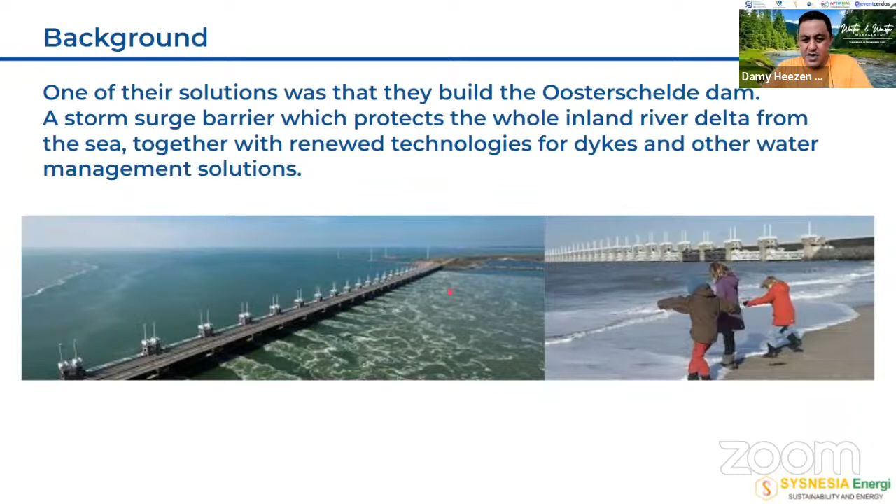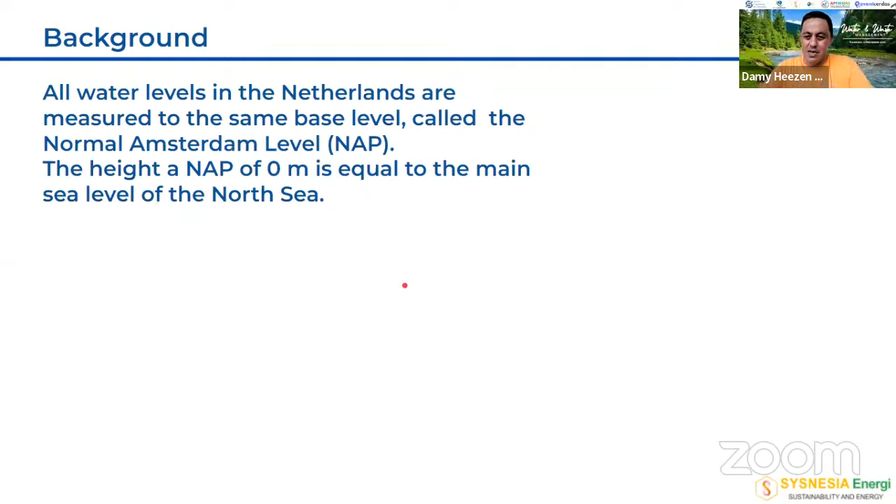So in the Netherlands, all the water levels are measured at the same base level. We call that Normaal Amsterdams Peil, NAP level. At the height, NAP is 0, and it's equal to the mean sea level of the North Sea. This is a special pole in the river in Amsterdam, and that's the symbolic number 0. Everything is measured above or below that.

And so until today, even when the Netherlands is one of the best countries in the world in water management, we still have challenges, and it still causes big problems. If you see the picture, the rivers like the Rhine and the Maas start in the mountains in other countries, and the melting ice always comes down with all the rivers together, and then it will flood the highland, and so the inland of the Netherlands.

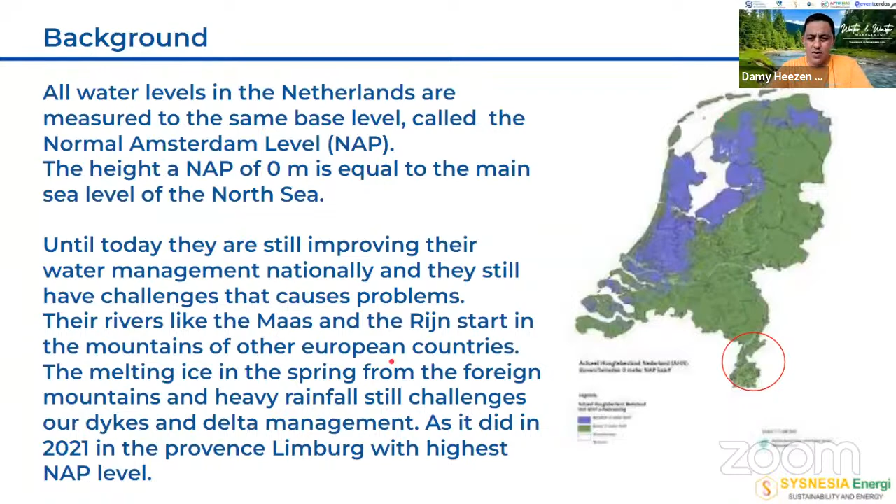For example, last year in Limburg, that is one of the provinces with the highest NAP level, maybe 30 to 40 meters above, it was destructive. Cars, furniture, houses, everything broke down, simply because rivers flooded. So it's not only an Indonesian thing that flooding damages. This was just last year in the Netherlands because of flooding rivers that come from Germany and France into the Netherlands.

As you can see, how much devastation.

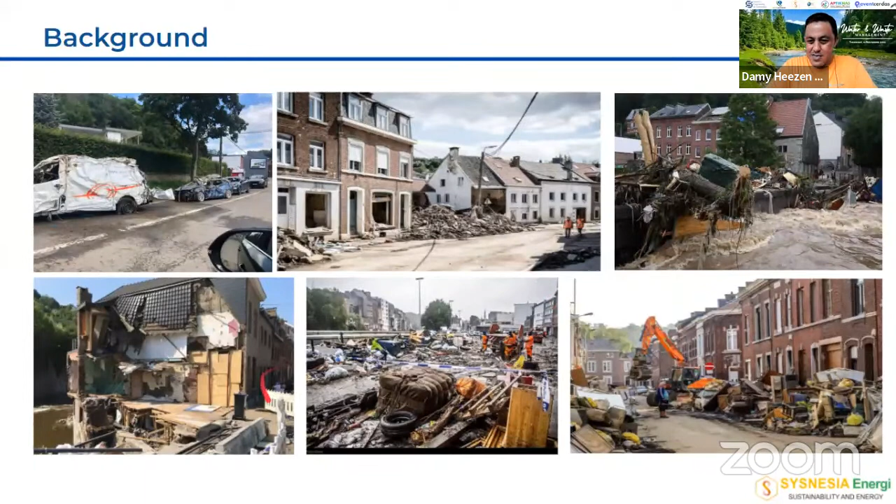So even when we are the best, we still have big threats, and the biggest threat is still to come. Like Indonesia, the sea level is rising, and in the Netherlands they expect a sea level rise of 5 to 7 meters, maybe even 15 meters. That's a huge challenge, mainly for cities like Amsterdam, who's 2 meters under NAP, Rotterdam, who's 5 meters above NAP, and The Hague, that is 6.5 meters under NAP, but also sinking like Jakarta. That is also a big challenge.

And so if we do nothing, then the Netherlands will flood like this. More than 40% will be underwater if we do nothing. Of course, we did something, and that's what I'm going to explain a little bit about.

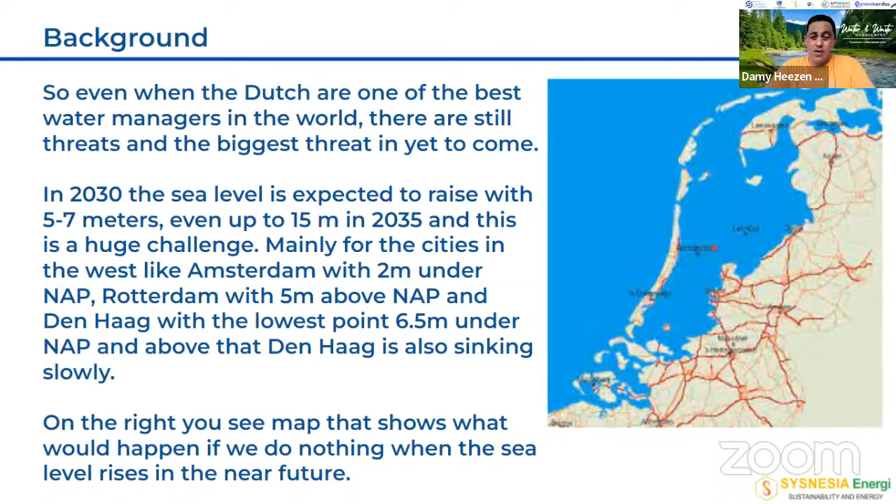Many cities are already prepared. In the Waddenzee, there's already improvement, and in the IJsselmeer there's already a lot of improvement. There's a lot of canals that they are making, a lot of water irrigation, sponge systems. So there's a lot of work going on, deepening the lakes.

So let's take Rotterdam as an example. Rotterdam and Amsterdam have a lot of challenge with rainwater, separate from the threatening sea level that's rising. And when the sea level rises 5 to 7 meters, this is a really big problem for the almost 800,000 people that live in Rotterdam.

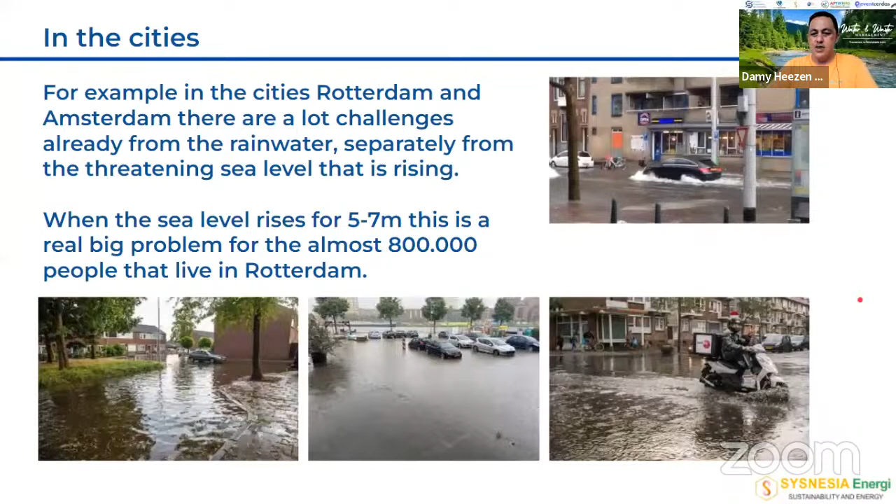If you see, this is a normal rainy day. And it's the same phenomenon that we can see here also in Jakarta, for example, or actually in Java and other islands. So it's not rare, and we still need to manage this. And we did a lot, I will show that. So let's take Rotterdam.

If they do nothing, then the city will look like this. This is actually normally a boulevard, in the business area and the tax office around the Erasmusbrug.

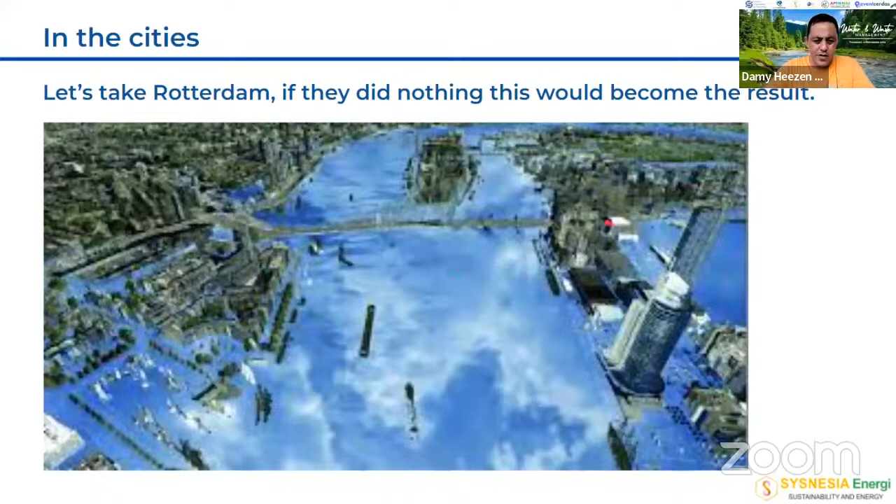So how did Rotterdam solve that? Because that's actually what we want to know. How did they manage to protect the city from the sea level rise and the increasing rain?

They're not done yet, but the targets that they had for the first protection plan and transition of the city are already done. So over the last 15 years, they worked hard on it. And of course, they're not done. They're going to do it further on.

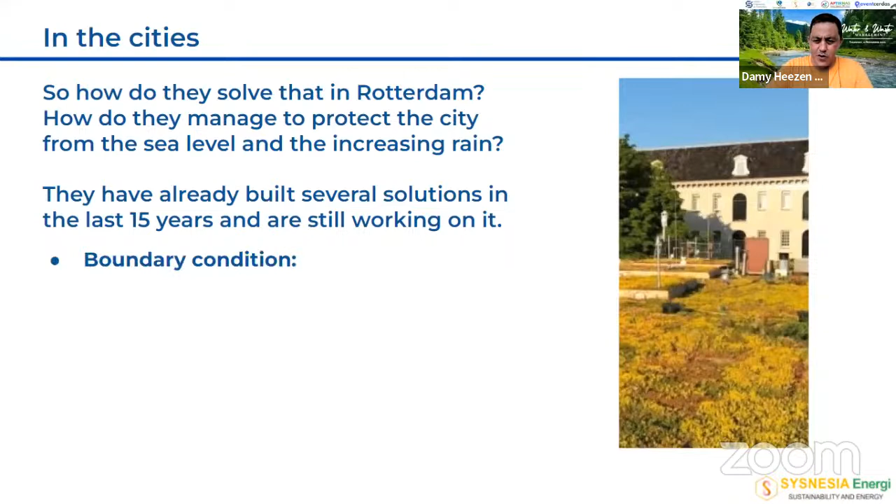There are some boundary conditions. There's a rainwater ordinance, meaning the government has a building regulation for rainproof development where 60 to 90 millimeters per hour of rain should be absorbed into the infrastructure, stored, or drained. So store at least 60 to 90 liters of rainwater per square meter and drain this over the next 6 hours, meaning by water reservoirs, lakes, ponds, everything possible to absorb water, the infrastructure has to absorb that.

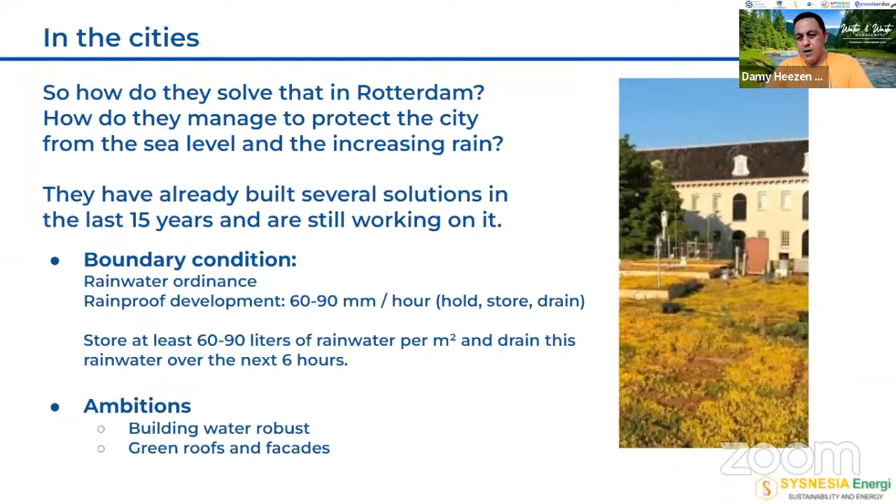It is also for many reasons. The ambition is that there will be a lot of green roofs, because green roofs also hold water and then the plants use it, and that way it benefits. If you combine that, in this case with facades, you have the same effect. And also with building water robust, meaning merging the building with water usage.

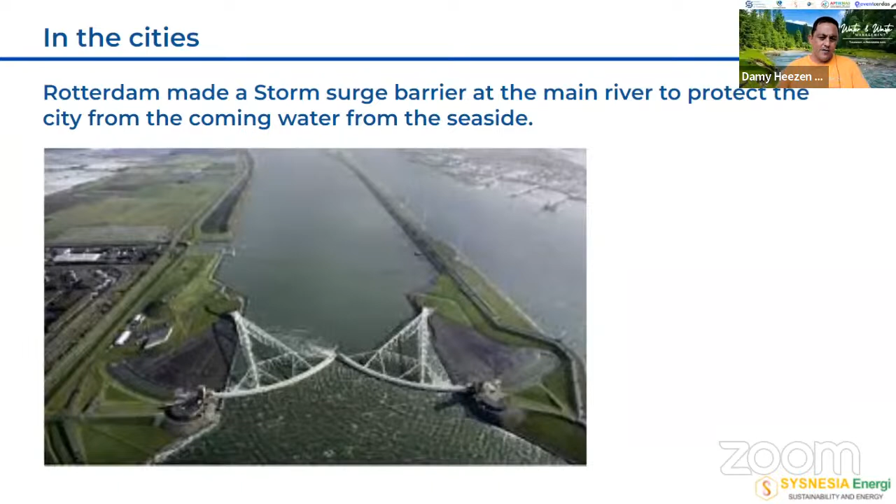In the big plan, first what Rotterdam did with the side rivers of the Maas, the rivers that access the city directly, they created the storm surge barrier simply to protect the city from the water from the seaside, to make sure that part is controllable. The river water is a little bit more difficult than the sea.

Rotterdam made a new water development plan, not only to protect the city, but also to let water become one with the city. Part of the city will be on the water, and part of the city will be serving as a sponge to store and manage water.

If you see the central area, that's where all the shopping is and the big shops and offices, that is Singel City and sponge city. Many of the water in that area is actually absorbed by underwater structures, smart engineering, and green rooftops.

River City is, of course, living with the water, and that is now expanding in this area where they are creating floating harbors, but also floating living blocks.

And then we have Canal City, where we smartly merge the water into small canals in the parts where we live. And that makes a triple function, right?

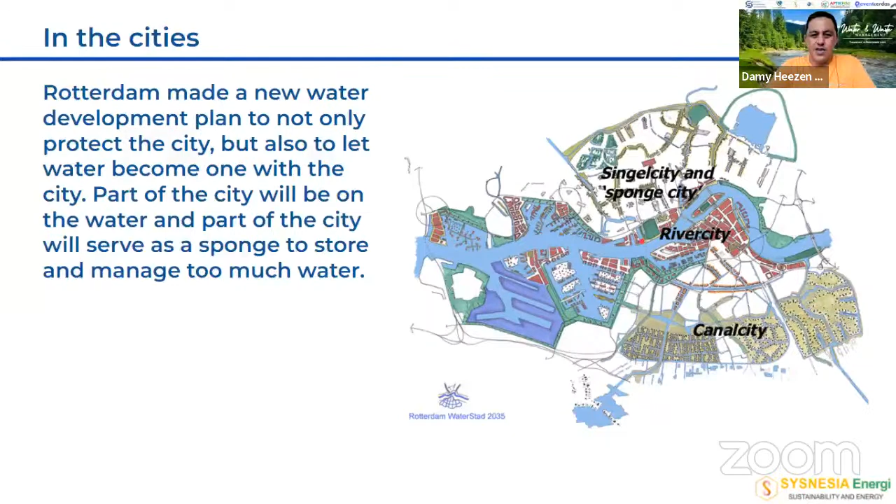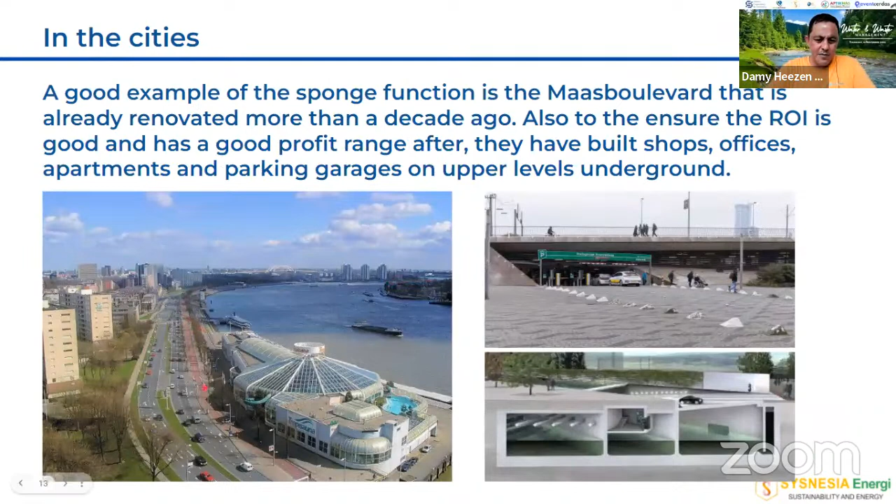A good example of sponge function is the Maas Boulevard. Maas Boulevard is a big boulevard that looks like a lot of concrete, but what's really happening under the Maas Boulevard is that, as you can see on the right, they have water canals under it. So when the river floods, the water goes under the road first instead of above the road. They have special areas you don't see here that can flood, meaning the water has more space and the river can expand a little bit.

To make sure the return on investment of the infrastructure is shorter, they created parking garages and all kinds of facilities like swimming pools, hotels, restaurants and shops, but also apartments on the boulevard. That way such solutions become profitable and get a lower return on investment, because in the end it doesn't only have to cost money, it also has to make money.

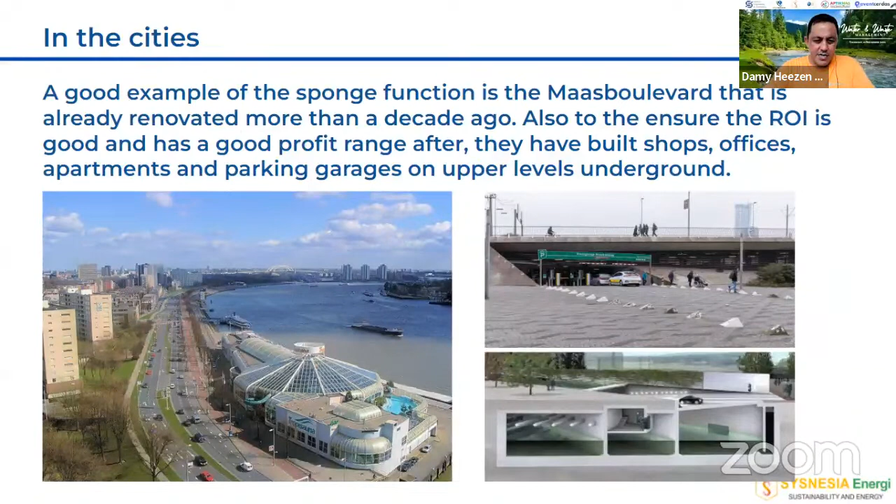That's the most important thing: to sponge more water and use the benefit, the city gives subsidy for green roofs. So in Rotterdam, green roofs are booming at the moment.

Inside, you can also park your car in 2 stories, and on top of that, you have a rooftop, and on the rooftop is a park where people can relax, have a picnic, and that kind of stuff. So it is one of the smartest objects in the world, I think, with multiple space use.

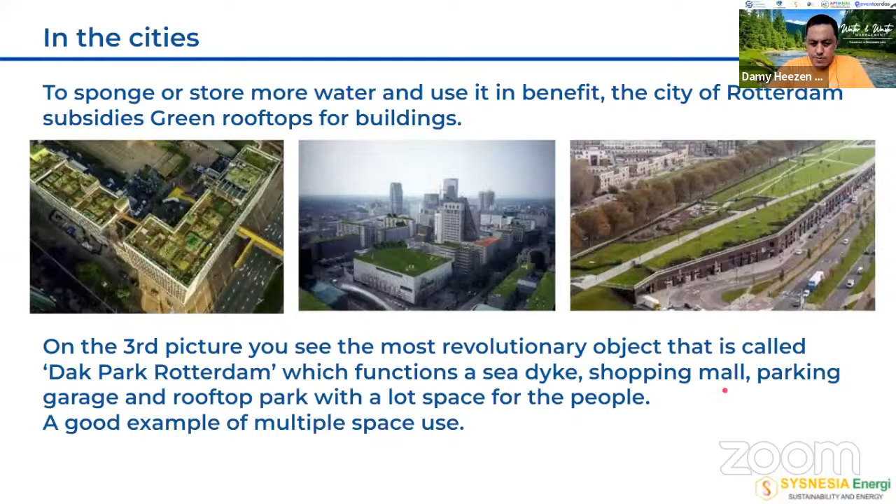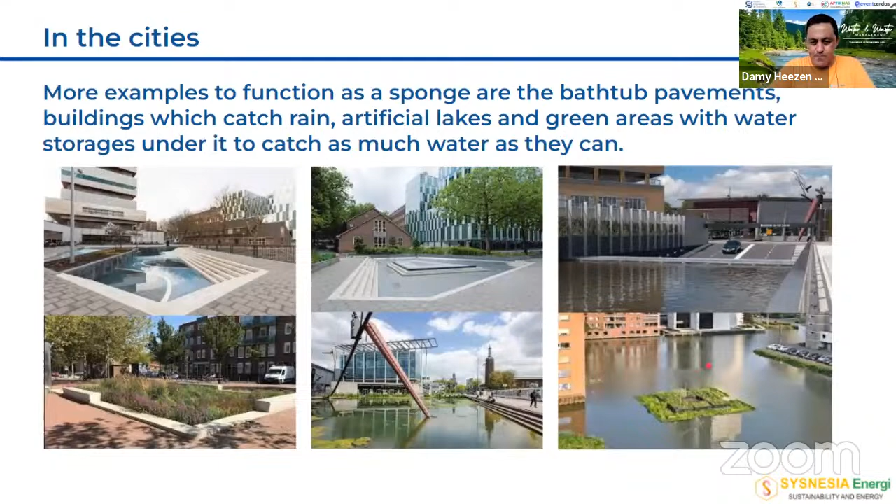Then in the second part, we're going into the floating situation. This is a new project, now moving to Nassauhaven in Rotterdam, where they want to introduce floating houses, so you can live on the water.

And then we have the floating farm. Floating farm is a unique concept. What they did is they have an 800 square meter farm, 2 stories high, with around 40 cows on top, with a location outside on the shore for them to graze, and under it a factory for all kinds of products like milk, cheese, yogurt, those kind of things, and it provides its own energy. So this object is fully off grid, and also provides food for the city, and that makes it possible to grow food and raise cattle to supply the city with agriculture products.

Why is this unique? Peter van Wingerden, the founder of this, chose cows not because cows are cool, but because cows are the hardest thing to do. Of course, he could have chosen lettuce or paprika, but if you can put cows on a floating island and it works, then you can actually grow anything.

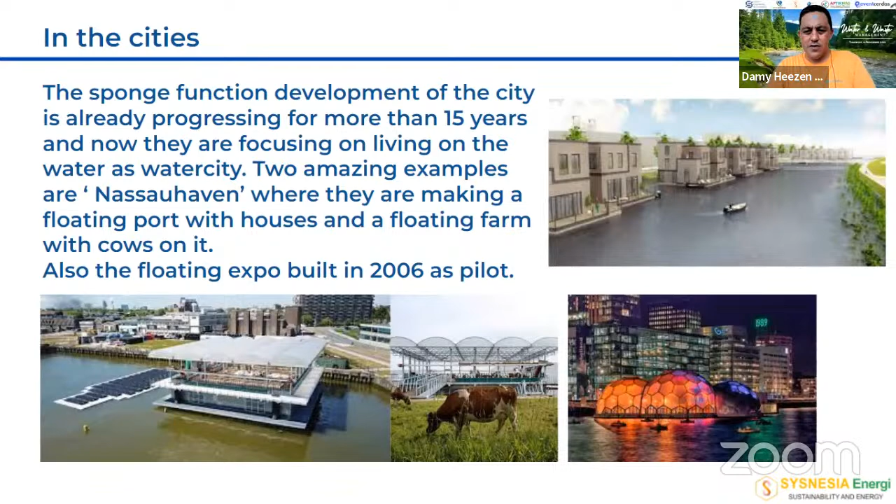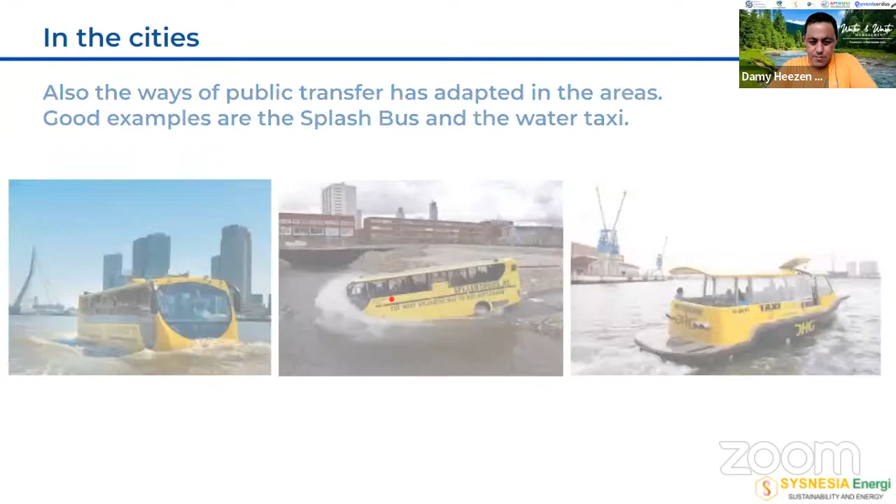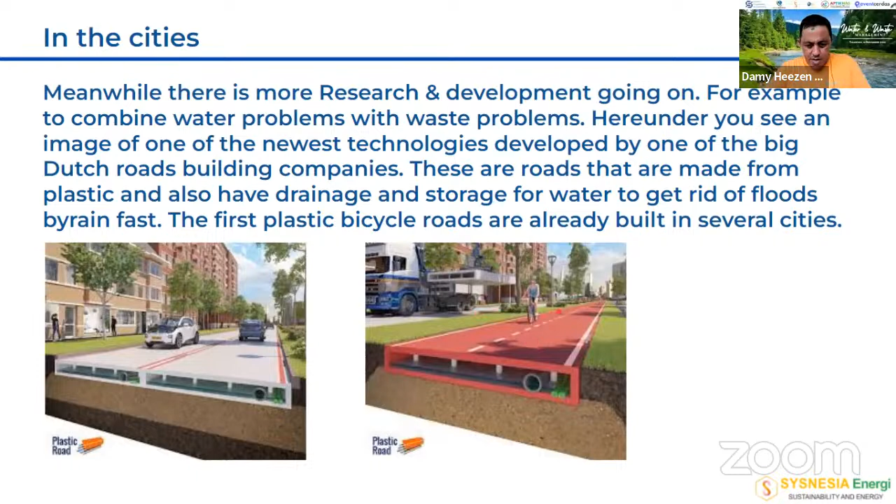With the present climate change, water management is a very hot topic. And in my network, I will try to help Indonesia find suitable solutions for every challenge in the business-to-business structure.

This is just one episode about water management. The reason I chose this is simply because I have a lot of conceptual designs, made for Bangladesh, made for other countries like Jakarta where we have a lot of flood solutions. But today I wanted to show how we made it for Rotterdam, because that's already proven, it's already there, and we can learn from it.

And the most important thing is that every infrastructure is different, so that means every solution is different. Indonesia originally has 2-3 months rain season, maybe sometimes 4 months, and the other months there's no rain. So there needs to be a solution that can balance the cost and benefit. I have several ideas for that, but I can do that in another situation, maybe in a private session.

For example, here we have the Ciliwung and the Citarum River. Citarum River is seen as one of the top 3 biggest disasters in the world. I've lived in Indonesia for 6 years, and I've been involved with the Citarum team for almost a year, 1.5 years, and actually it's not that bad, it's solvable. It can be solved simply, but for that you need community development - you need people to work with you.

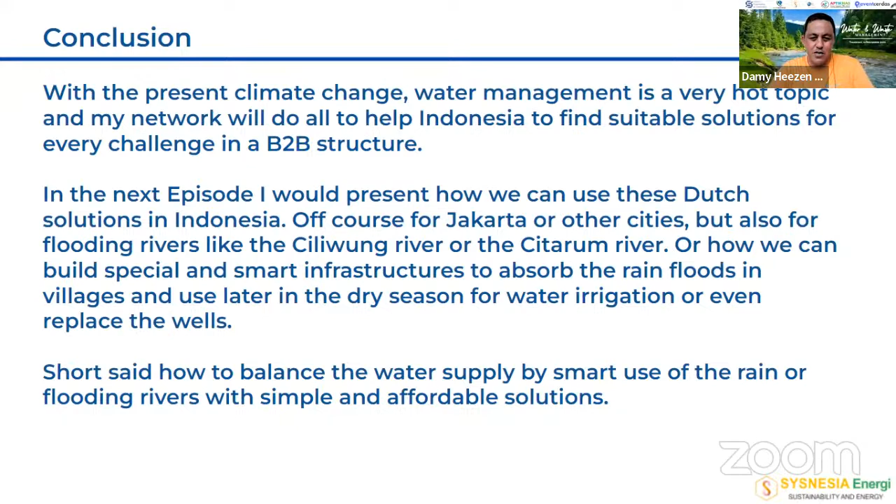So shortly said, how to balance water supply by smart use of rain or flooding rivers with simple and affordable solutions. Sustainability doesn't have to cost money. Water management also should not be costing money. Yes, it costs money to build it, but it should be profitable for the social economy and for the governments where this is located.

Because I have just a half hour, I want to keep it short. I hope it was kind of interesting.

But Fanky, do you want to go for question and answer, or should I go to the next topic? I think there's only one question asking whether they can get the PPT, so I think we can go forward to the next topic. We will gather the questions in the question and answer session. Okay, Mr. Damy, okay, then I continue.

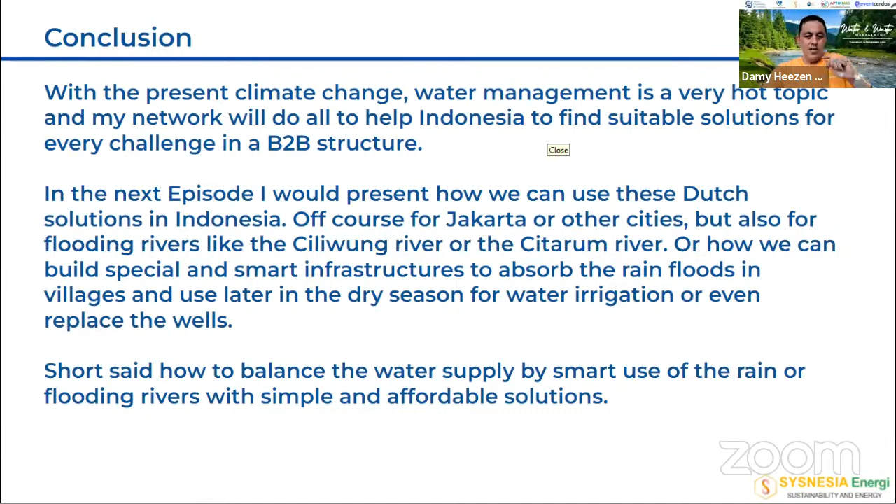So the next topic will also answer the question I just saw: waste management. Everybody knows waste, right? And it's a big problem. Believe me, not only in Indonesia, even in the Netherlands, waste management is a big problem. I'm going to show very simply how we do it there.

What is - how does the Dutch do waste management? Then I will explain a little bit about the basic principles of the technologies. The Netherlands is well known for having one of the best waste management systems in the world. We are actually zero waste, if we talk about municipal waste, and don't talk about construction waste. This is because all our waste is collected as much as we can and processed.

In the first picture, that is how they pick up the waste from a citizen. This is how the companies, in the second picture, offer their waste. Yes, we do split it into organic, non-organic, and sometimes plastic, and sometimes other materials, but I don't want to accentuate that because that's not the most important part.

For chemical waste, we also have special treatment, like what you see here in Indonesia, a lot of motor shops that serve and throw the oil in front of the door. If you do that in the Netherlands, the government will close your shop in one day. You're not allowed to have that next to water. And then next to that, we have waste from constructions.

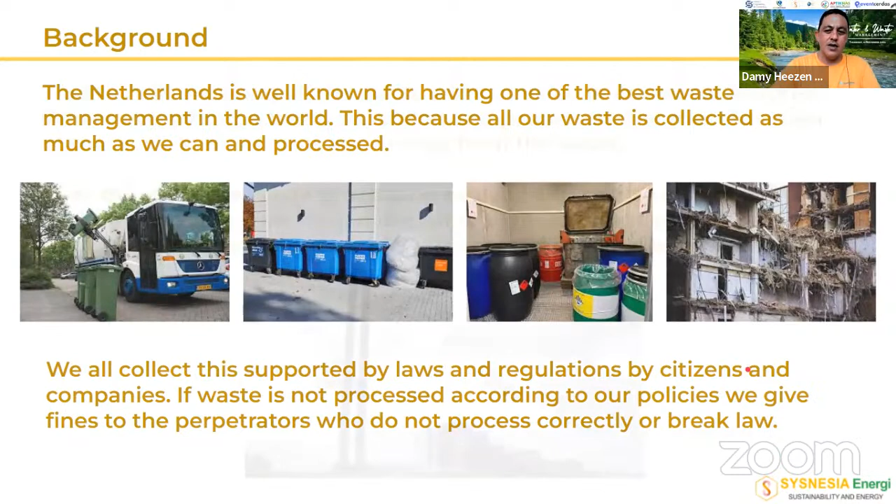Traditionally in the Netherlands, we take all the waste without value to our waste facilities, and there everything is separated and processed. The main function of these is to make heat and energy from the waste. Over the years, waste processing evolved, and some kinds of waste that had no value now have more value than what we create through traditional burning energy factories, so they are processed into new resources.

For example, in the old days we didn't recycle plastic bottles; we simply burned them, and they became slag that went into the asphalt. That's how we made the waste profitable. We burn it like biomass, into energy, and we make heat and energy which we sell. In the Netherlands the climate is cold, so instead of gas, we use residual heat from these factories.

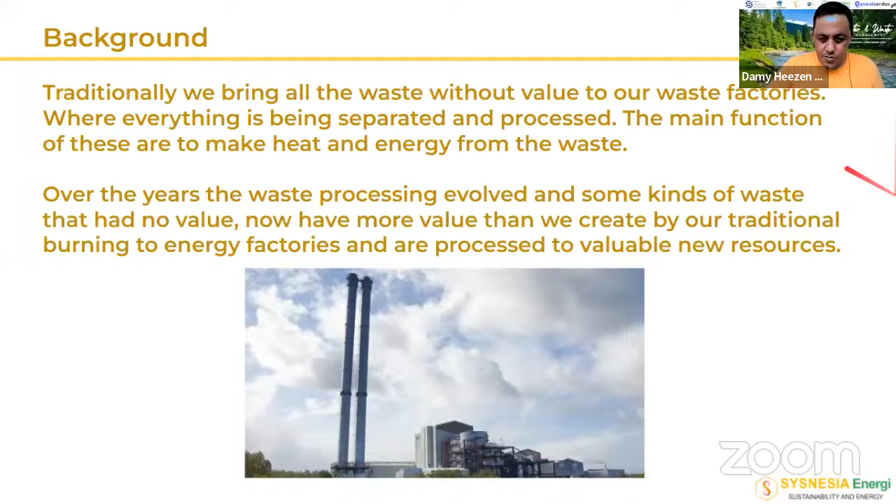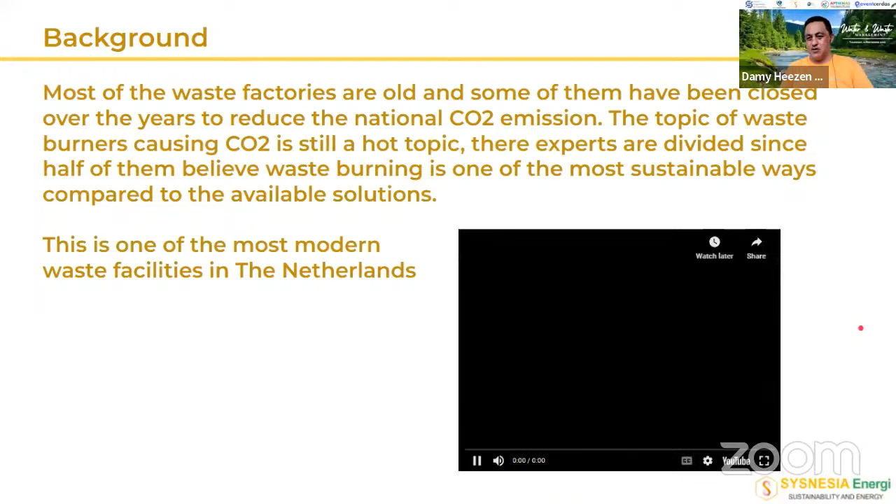Most of the waste factories are old, and some of them have been closed over the years to reduce national CO2 emissions. The topic of waste burners causing CO2 is still a hot topic.

The experts are divided, since half of them believe waste burning is one of the most... I thought the sound was off.

Most sustainable waste processing compared to other available solutions. So waste burning is, according to a large group of experts in the Netherlands, more sustainable than any other way of processing waste. And not because of the CO2, but because of all the other problems you get when you process it differently. What you see in the movie, I'll show without sound because that's important.

This is the most modern waste facility in the Netherlands. This is the HVC in Alkmaar. Actually one of the projects I used to work on as a contractor. This one is aimed at low CO2 and a large recycling capacity.

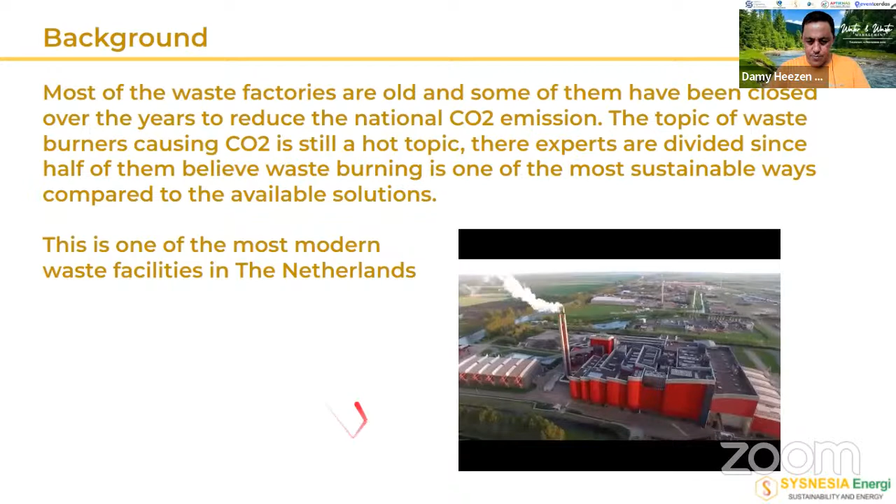So, next slide if you let me. Wastewater, the question I just had, also has several different methods which are forever evolving. Our main wastewater is collected and transported by our sewer infrastructure. That's what we do with the grey water, it goes into a separate channel in the sewer underground. We have a separate underground infrastructure for grey water.

So that should not be mixed with the rivers. It does happen, by the way, especially in the smaller infrastructures.

Before it goes back into the river, it goes to water treatment. So it goes to the sewer, then to the water treatment, and then back to the river or to the drinking water facility. In some cases, we also make drinking water in the waste treatment. That's mainly what we do.

But also in the Netherlands, we have illegal dumping and legal dumping. There are certain companies that are allowed to throw their chemical wastewater into the rivers in small proportions. This isn't always welcomed by everybody. A lot of people are still fighting it, but it still happens.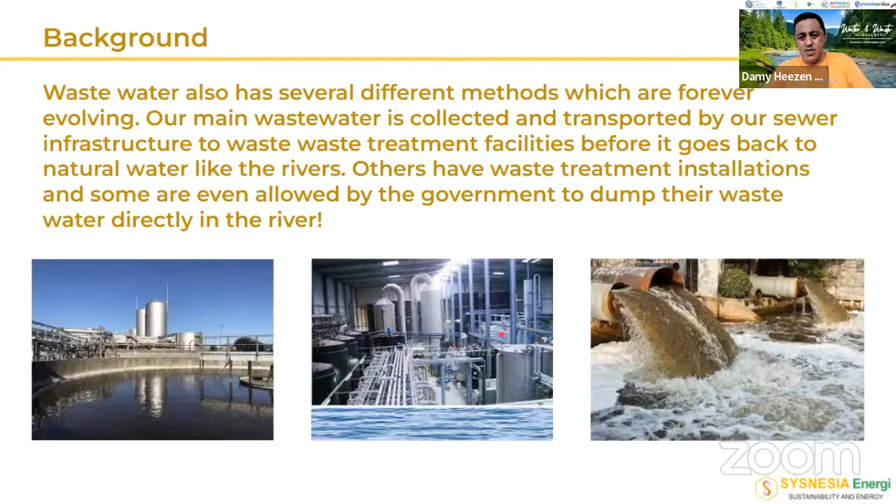Then, next to wastewater, we also have plastic. Plastic is not processed in our country. So the Netherlands never has a plastic problem because why? We bring it all to Asia.

However, since 2019, Asia started refusing the plastic waste from Western countries because it ended up in nature more often than it really was recycled.

Some people blame Asia for being the biggest plastic polluter in the world, but most experts know that the bigger part of this plastic is coming from Western countries. The plastic you see in the sea, especially around the Gulf streams and ocean currents, in Japan for example, or in the Great Barrier Reef, is not coming from Japan, Indonesia, or Australia. It's coming from Europe, America, and other Western countries, traveling thousands of kilometers and coming together there. That's why you have a lot of floating islands.

Some of the smart cartel people in the world know that, so they buy the plastic because someone pays them to pick it up, then they throw it somewhere in the sea, knowing it will not be their problem anymore. That's a big problem already for a long time, not easy to solve, because sometimes it's cheaper to pay someone to throw it in the sea than to really transport it into Asia to do something with it. So there are many things going on like that.

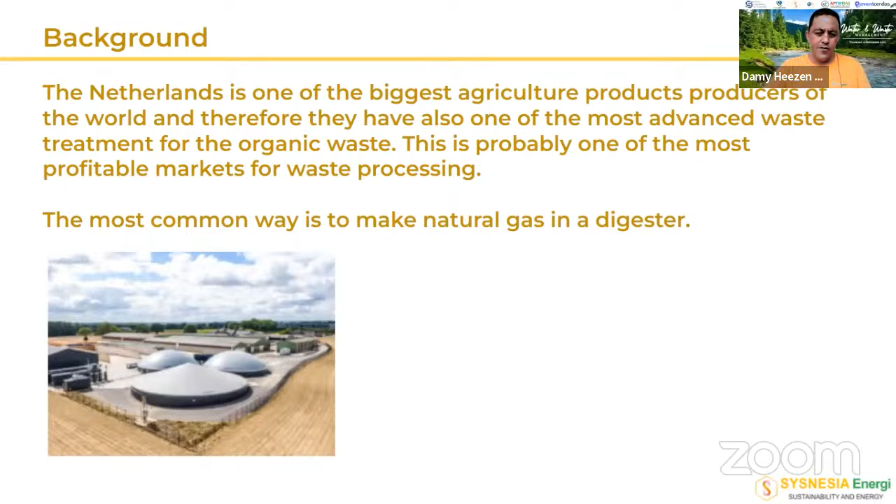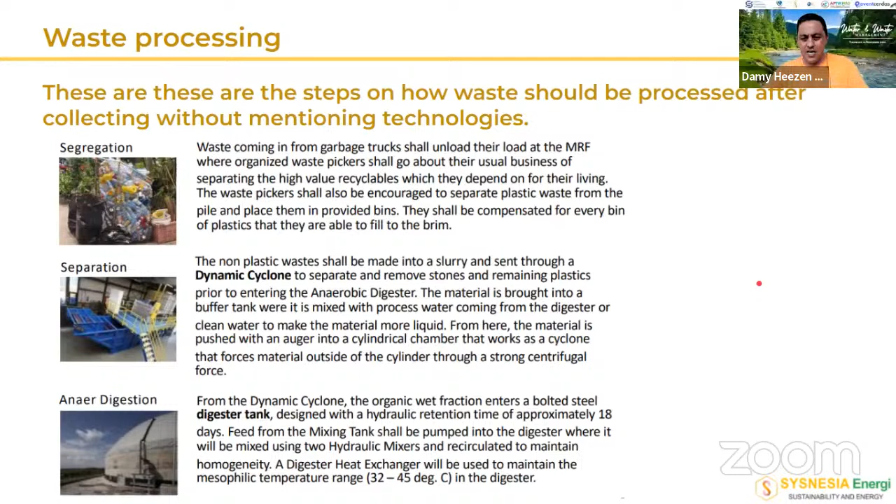When we process that whole waste stream, we go through 5 steps of how waste should be processed. First we collect it, then we segregate it, then we separate it, then we do anaerobic digestion of all the organic material, then biocompression of the organic, and we have a new technology called pyrolysis from ReGen, where we can actually break down molecules and rebuild them in purity.

And that way they can make diesel, they can make even new rubber, and all kinds of other stuff are possible with these methods.

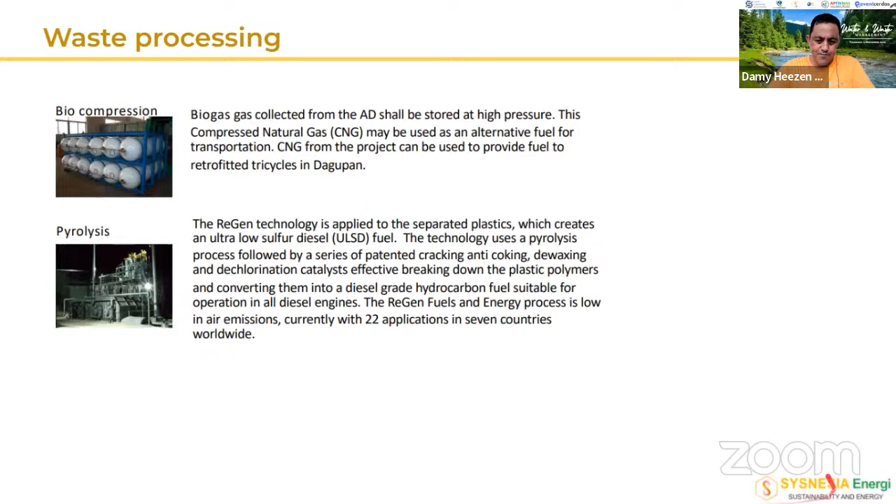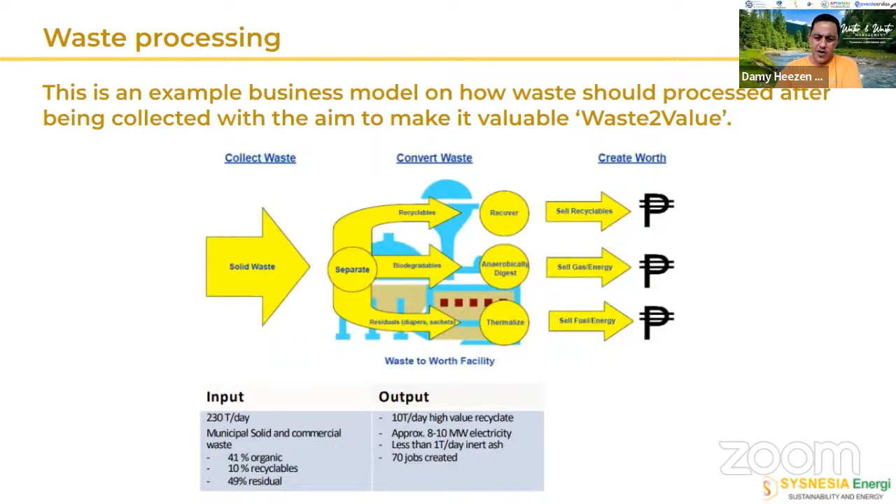Another example could be that you collect the waste, you convert the waste, and you create worth - that way you can create recyclables, electricity, gas, or fuel. There are technologies possible for this. There's a reason I show this, which I'll explain now.

If you look at the installations I showed you before, where we burn waste to energy, all the municipal waste - those technologies are really expensive. That means when the garbage trucks come to my house to pick up my waste, I have to pay tax for that every month. As a citizen, because I own a house, I have to pay the tax so the government can pay the garbage truck to pick it up for me.

The companies will pay a price maybe 5 to 10 times higher than me, because the garbage truck also has to pick up their waste, and they have more than me. And then we have the industries that make waste, and they have to process the waste themselves or pay the government, plus they have to pay extra tax when they produce or use chemical products.

Next to that, the government will also put in money that is short, to make sure we can pay the operational costs of the factories that burn our waste to energy. Then the energy is our return on investment, our payment on installation. The return on investment of such old installations still running in the Netherlands is around, let's exaggerate, 40 to 60 years.

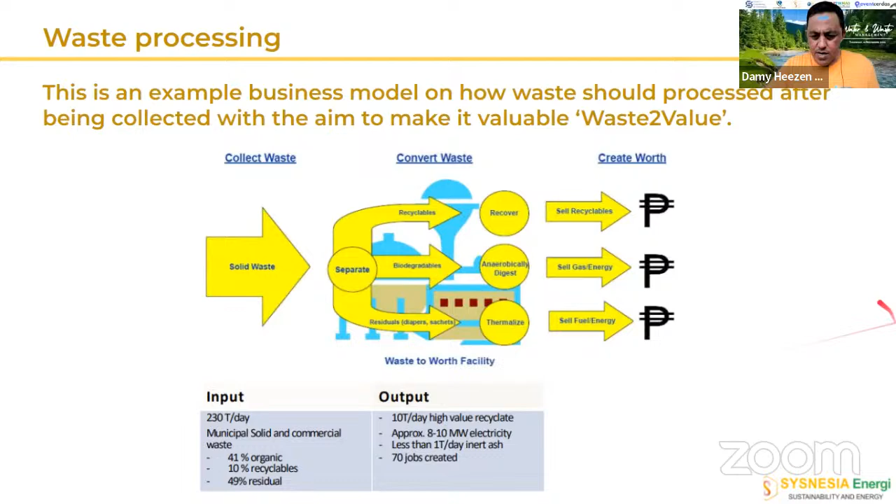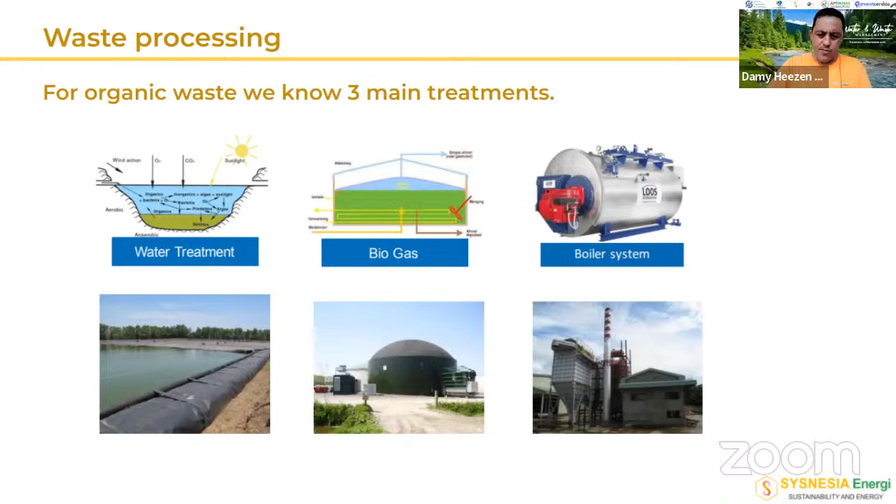Okay, next, going back to the organic system, let me show you the last three briefly, to show what kind of technologies are possible and what they do. We have water treatment, biogas, and a boiler system, a furnace. What we can do if we take biomass with the furnace is simple: you can take any kind of agriculture waste, but also old furniture or recycled wood from buildings, and burn that into energy to feed the grid. But the furnace is always pretty expensive.

Electricity is commonly sold for 6 cents per kilowatt around the world, and to make this affordable and profitable, it should be around 11 to 12 cents. And there's the challenge, right? If you only get 6 cents, the return on investment will be 20, 30, maybe 40 years, depending on the kind of installation you're building and how big it is.

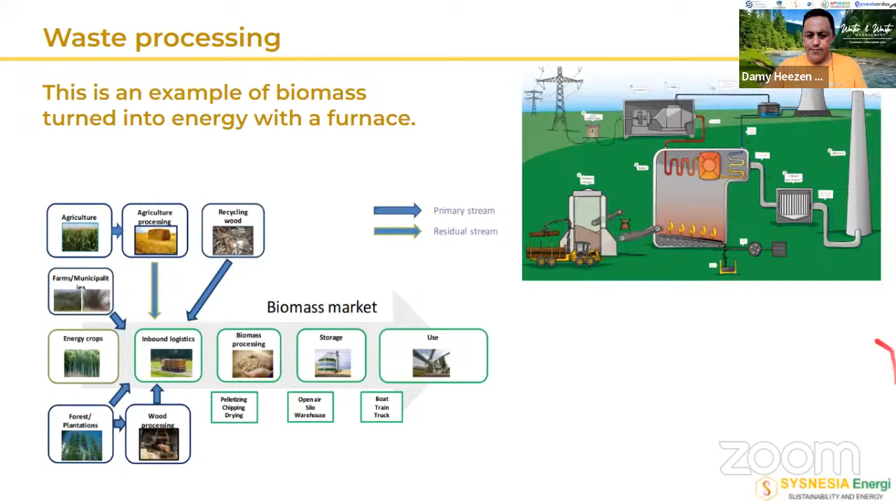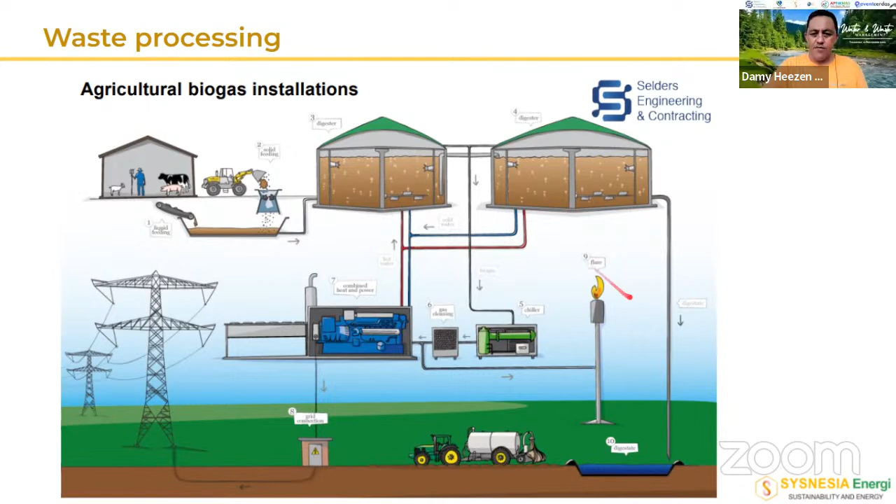Then we have industrial biogas installations, a little bit of the same, only focused on making the food industries and their waste into gas and into energy, but also pupuk and water.

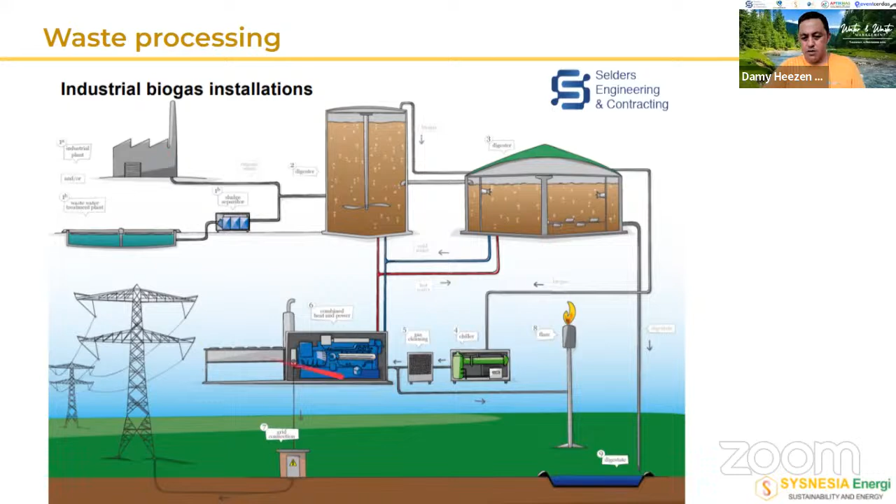And then the last one is wastewater treatment installation, where you can make gray water, any kind of gray water, with bacteria treatment into energy, into biogas, into pupuk, but even into fresh drinking water that you can sell as distilled water if you break it down fully. So there's many ways to make things profitable.

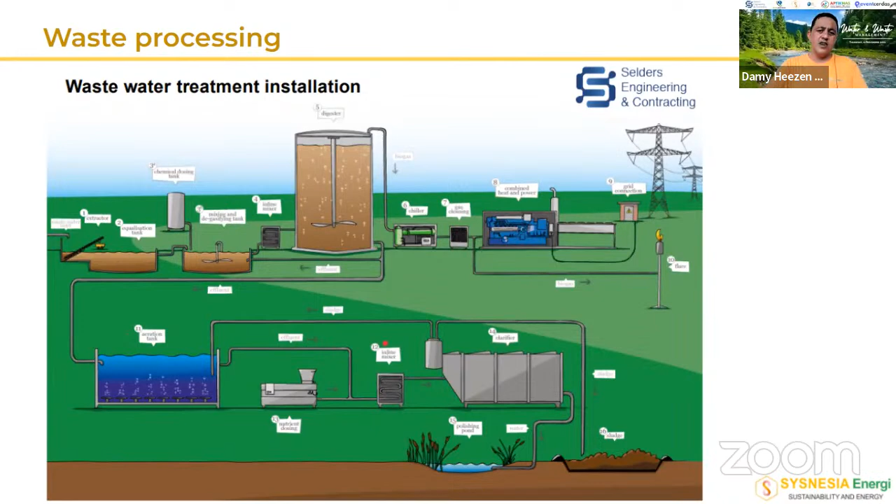So my statement is that a profitable technical solution for waste processing with an ROI of less than 10 years, that doesn't exist. Not yet. I wish it was. And yes, there are exceptions, I know some of them, but these are patented and cannot be used by everyone.

And then we have waste management, which starts with a good local policy and with education of the communities. For example, if I go to the kampung of my wife and my children are outside, I teach my children that they have to throw their waste into the trash can. And then I buy ice cream for all the children.

And then what happens is that the whole group of children wrap the ice, throw it on the floor, eat the ice, throw the stick on the floor. And then my son, he ends up picking up all the plastic and the sticks and throwing it in the trash can alone. But it's part of education, and it has to become a habit instead of a challenge, right? So a clean environment starts in one square meter around you, by cleaning your area, and if everybody does that, it will be much cleaner already.

And the key of a clean environment is very simple: work together. Bali last month is a good example, where the whole community started cleaning the whole area. They just took plastic bags, walked to the mangroves, cleaned all the waste, and now it's clean. And it took them a few months, after years of complaining.